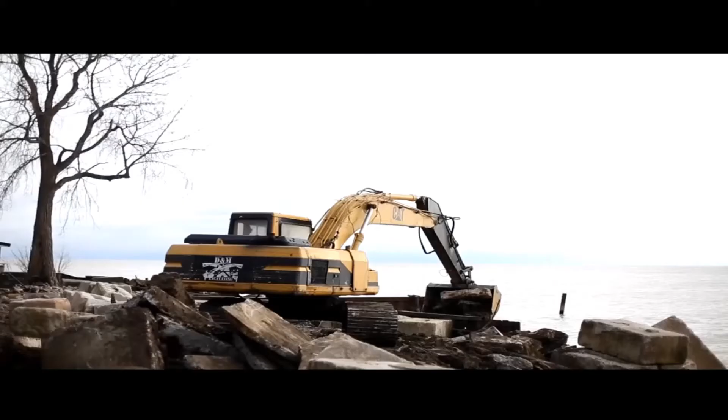I love it out there. And so, I'm actually struggling with what do I do? It is hard for me to think about just walking away because it is a great community. It is so much more to me, certainly, than just a piece of property. But at some point, you have to think, what's the definition of craziness? If I just keep pouring money into it and nothing changes, you have to make some hard decisions. And I think, unfortunately, there are a lot of property owners right now that are faced with some very difficult decisions.

Good morning, Professor Siriani. My name is Joe Ayatona, and I would like to speak with you today about shoreline protection and how it can be implemented to guard against the staggering effects of erosion along the shoreline that surrounds Windsor and Essex County. As you just saw in the prior video, the 165-kilometer shoreline that surrounds our region is under attack. Windsor and Essex County is surrounded by three bodies of water: Lake Erie, Lake St. Clair, and the Detroit River.

Since its inception in 1973, the Essex Region Conservation Authority, also referred to as ERCA, has been empowered through the Conservation Authorities Act of 1946 to further the conservation, restoration, development, and management of natural resources within the area of its jurisdiction. ERCA's jurisdiction spans approximately 1,681 square kilometers across 9 municipalities, over 4,200 acres of natural lands, and is surrounded by the 165 kilometers of shoreline that is the focus of this presentation.

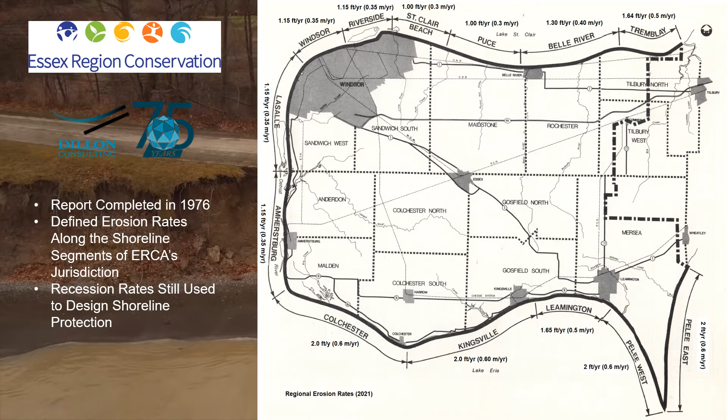A study was completed in 1976 by Dillon Consulting that defined the shoreline erosion rates for this region. Windsor-Essex County was split up into segments along the shoreline and investigated individually to determine each segment's rate of erosion. These erosion or recession rates are still used today in designing the appropriate shoreline protection methods. There are three main factors that affect regional shoreline erosion: variations in water levels, waves, and the physical composition of the shoreline.

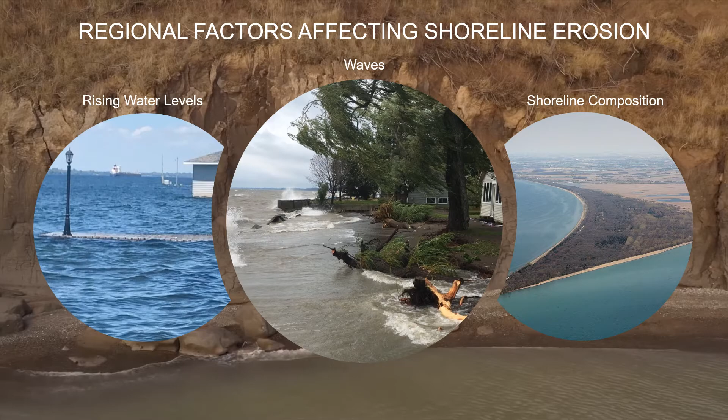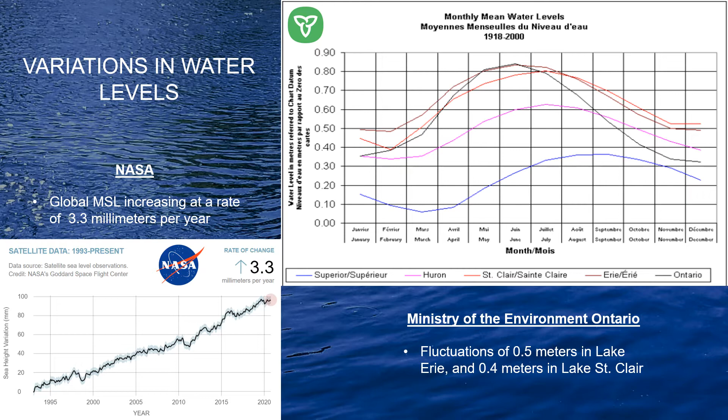Water levels around the world are rising at an alarming rate. When examining these charts provided by the Ministry of the Environment, you can see that the monthly mean water levels of the Great Lakes fluctuate by more than 0.5 meters in Lake Erie and 0.4 meters in Lake St. Clair. These fluctuations change the location of erosion along the shoreline and can be considered as a primary cause of shoreline erosion.

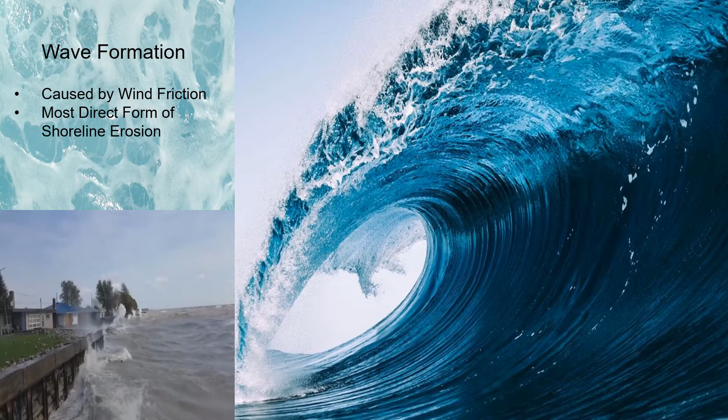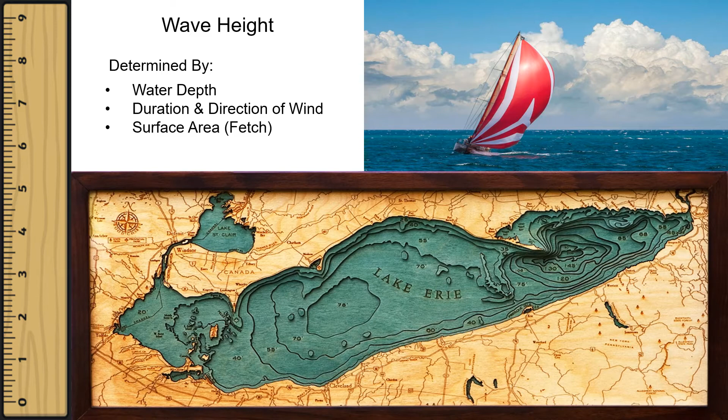Waves are a result of winds creating friction along the water's surface and are the most direct form of shoreline erosion as they are constantly breaking down and reforming the natural shoreline. Wave height is a function of water depth, duration of wind, and the continuous water area at which the wind blows, commonly known as fetch. As you can see in this figure, the greater area or distance over which the wind has to blow, the more time a wave has to build or propagate.

Since Lake Erie and Lake St. Clair both have enough surface area and length to facilitate fetch, it can be directly related to wave heights and should be considered when designing shoreline protection. Given that the Detroit River is as narrow as 0.8 kilometers and 4 kilometers wide at parts, fetch does not play a crucial role in wave height and development.

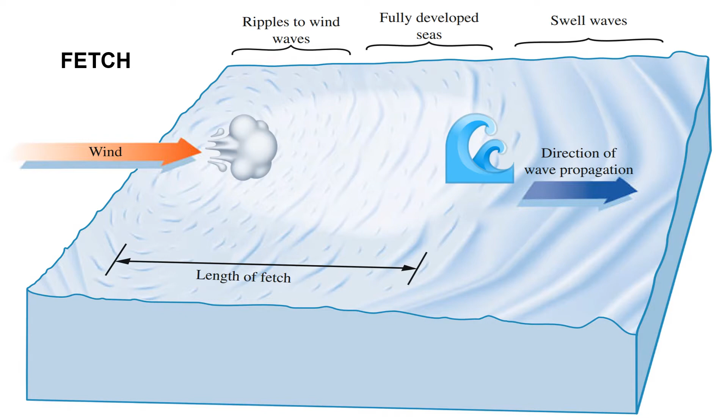Scour can be defined as the removal of the granular waterbed material from downward spiraling hydrodynamic wave forces. Scour is a type of erosion that occurs when a wave encounters a shoreline or coastal structure and its hydraulic action tumbles forward in a swirling motion towards the base of the system, more commonly known as the toe. This turbulent action dislodges granular material along the bottom of the structure and over time will undermine the structural integrity and cause failure.

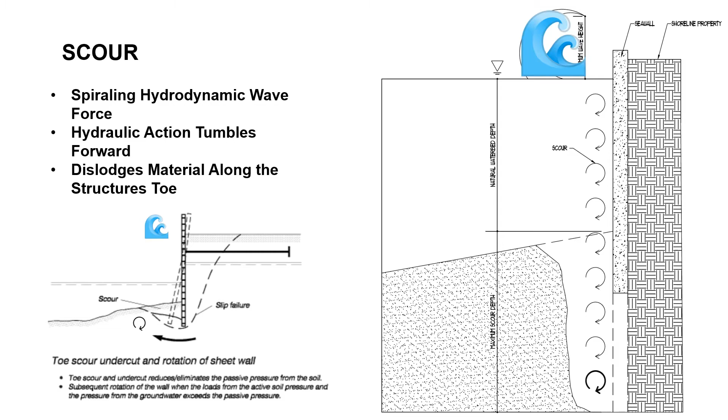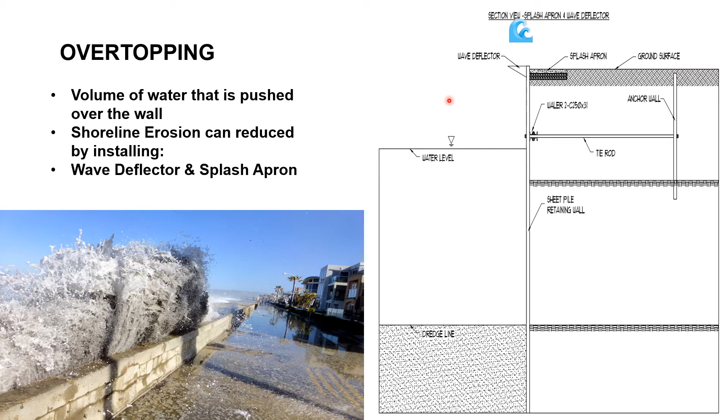Overtopping can be defined as the volume of wave discharge pushed over the crest of a break wall. As the water rushes over top of the wall, wave energy is not entirely dissipated and can contribute to a shoreline's recession rate. Most cases of wave runup and overtopping are a direct result of a storm surge. As you can see here, a wave deflector has been installed to guard against overtopping and redirects most of the wave's energy back into the lake. Also, a concrete splash apron is commonly installed to reduce the erosive effects of overtopping on the landside soil.

The land along the Windsor-Essex County shoreline is composed of glacial soils. These glacial soils are composed of many different soil types, with the most common types being clays, clay loams, sandy loams, and sands. When considering the erosion of a specific shoreline composition, it must be noted that particular soil composition and shoreline characteristics can either increase or reduce the erosion rate due to wave energy.

Along the sandy beaches of Point Pelee, the erosion or recession rate would be much lower than that of a steep slope shoreline or bluff, because the waves will break and exert their energy before they reach the shoreline. Along the Detroit River, the shoreline is much steeper, but not as wide as Lake Erie or Lake St. Clair. These geographical features create a different type of erosion due to the lack of fetch. The shoreline's erosion along the Detroit River is primarily due to river currents and waves generated by passing boats.

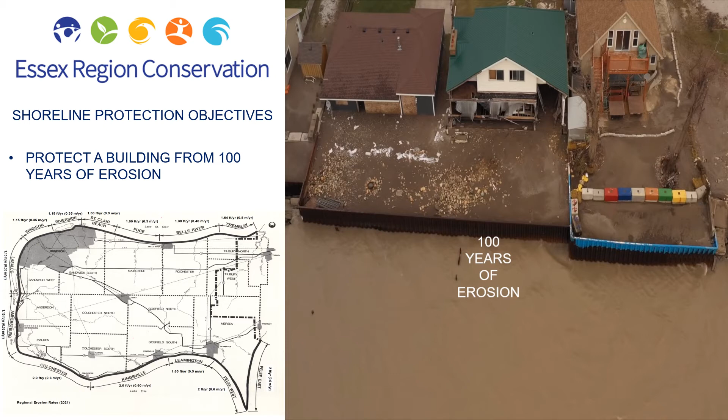Although there are many direct and indirect objectives of shoreline protection, the main objective that ERCA has outlined in their design criteria is to implement all necessary measures to protect a structure's building envelope from 100 years of erosion. For example, this figure illustrates a simulated scenario of an unprotected shoreline along the Detroit River and how the property's recession rate will affect any shoreline protection measure, since ERCA requires any new construction or extensive renovation to be constructed such that the 100-year erosion line does not infringe on the structure's building envelope.

As the figure shows, the property line indicates that its parcel dimensions are 100 feet deep by 50 feet wide. A proposed 25 by 40-foot building envelope will be set back from Riverside Drive. The rear of the structure is approximately 54 feet from the shoreline. When applying the yearly erosion rate for the Riverdale segment, 1.15 feet per year, without any shoreline protection, the erosion line ends up in the middle of Riverside Drive, 115 feet from the shoreline. After a brief analysis, this property will require shoreline protection.

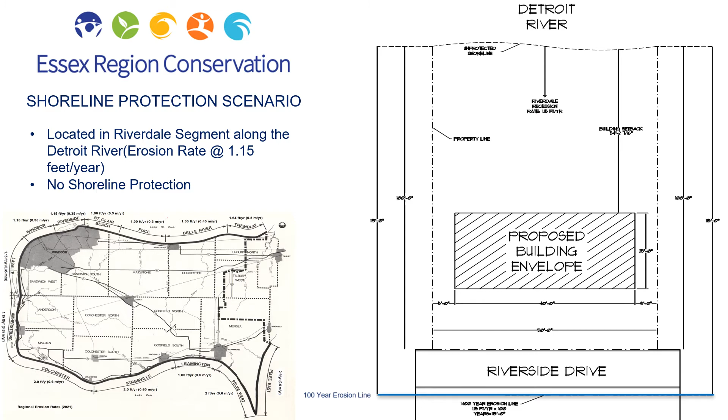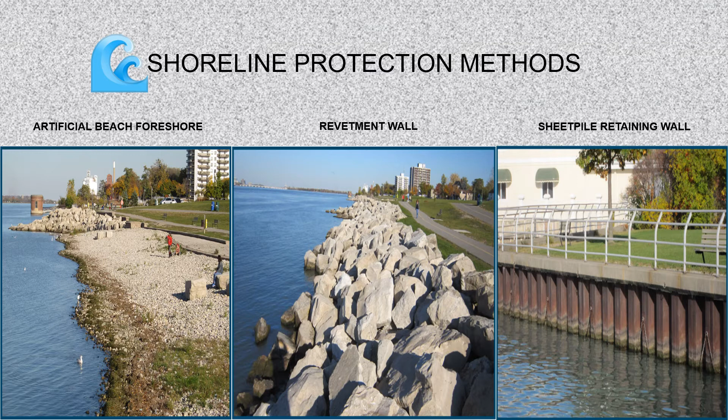Many types of shoreline protection can be constructed to prevent and decelerate the effects of erosion effectively. It is essential to include that this presentation will only identify the most common regional shoreline protection types applicable to this region. These protection types are artificial beach foreshores, revetment walls, and steel sheet pile retaining walls.

Also referred to as breakwalls, seawalls, or bulkheads, sheet pile retaining walls are constructed of corrugated metal sections that are connected together and pounded or vibrated into the waterbed. Sheet pile retaining walls are designed as cantilever walls that garner their strength from their embedment into the waterbed. Depending on the characteristics of the shoreline, tieback anchors are almost always connected landward to secondary anchor walls. This combination of embedment and tension gives the sheet piling its vertical stability and resistance to erosion.

A sheet pile retaining wall is the most expensive of the shoreline protection methods and costs approximately $500 to $700 per linear foot to install. The installation of an impermeable steel pile retaining wall creates a poor aquatic habitat for fish and often necessitates approval from the Department of Fisheries and Oceans Canada and a plan to offset the impact that the wall has on the habitat of the fish, frogs, and other aquatic organisms disturbed by the construction.

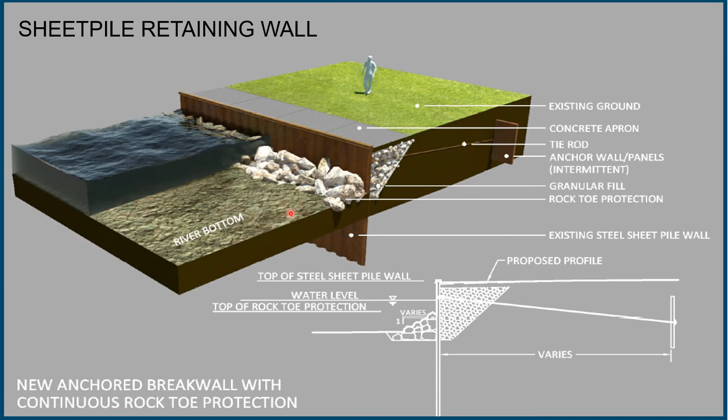Revetment walls are generally comprised of a layer of impervious material affixed to the shoreline slopes or embankments to protect the area from wave runup and erosion. The construction costs associated with the assembly of a revetment wall are much less than that of a steel sheet pile retaining wall. Revetments are naturally less complicated to install and are relatively easy to maintain. The average material costs associated with constructing a revetment wall can range from $100 to $550 per linear foot. A revetment wall will positively impact the aquatic habitat along the shoreline where it is constructed because of its natural sloping conditions.

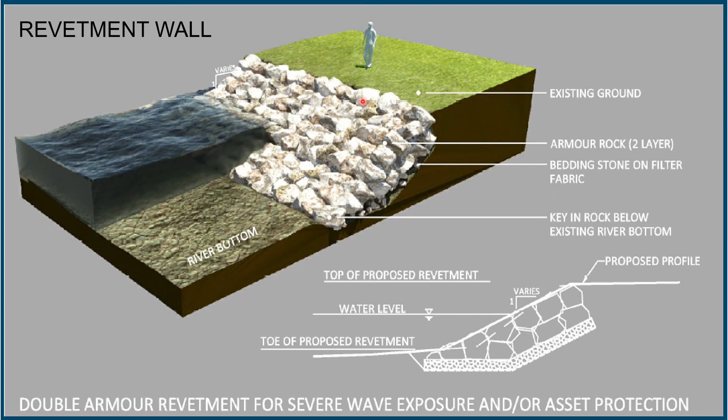Artificial beach foreshores can occur naturally or be artificially constructed of cobblestone or gravel. Many beach foreshores exist within the Windsor-Essex County region and present an effective, natural shoreline protection method. The average price of materials to construct an artificial beach foreshore in the Windsor-Essex County region is between $95 and $155 per linear foot. Maintenance-related costs associated with an artificial beach foreshore should also be noted, as they may have to be replenished periodically due to the dynamic nature of the material's reduced size.

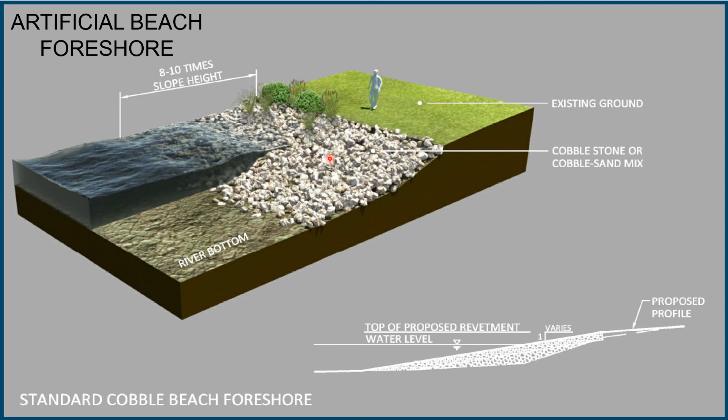An artificial beach foreshore will have a positive environmental impact due to the long-term improvements it provides fish and other aquatic organisms along the shoreline because of its natural composition and no need for additional artificial elements to render it an effective shoreline protection method.

In conclusion, the effects of shoreline erosion are very real and directly affect the region's ability to sustainably develop along the water that surrounds Windsor and Essex County. When constructing a new building or making significant renovations to a structure along the shoreline in Windsor-Essex County, it is required to follow and meet the criteria set out in ERCA's design requirements. Always contact a licensed shoreline engineer to design an appropriate protection method that can prevent and decelerate the effects of shoreline erosion and flooding.